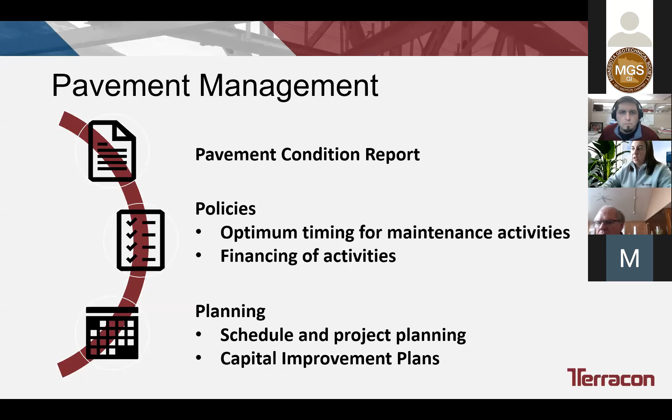Some people might be familiar with CIPs and cities really putting a plan together for, hey, what's our 5-year outlook, 10-year outlook? When should we mill and overlay? When do we need to do a reconstruct, and use the money we have wisely?

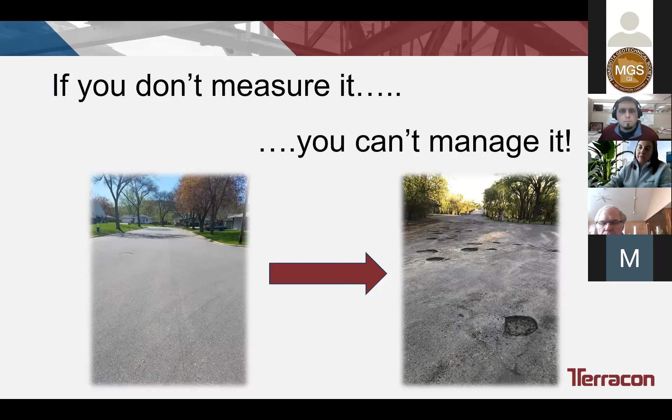So a kind of buzzword in my niche and industry is, if you don't measure it, you can't manage it. Like I mentioned, people saying it's good - what does that mean? So this data really gives people in public works, city planners, tools to help plan on a network level versus driving out and having a resident call and say, hey, my road's falling apart.

Giving them the tools to understand that. So what we collect when we do this is what we call a pavement condition index. Some people call it an OCI, an overall condition index, but it's a rating on a scale of 0 to 100. 100 would be a brand new road that doesn't have any distresses present in it yet. It hasn't cracked, so that's a perfect 100 rating.

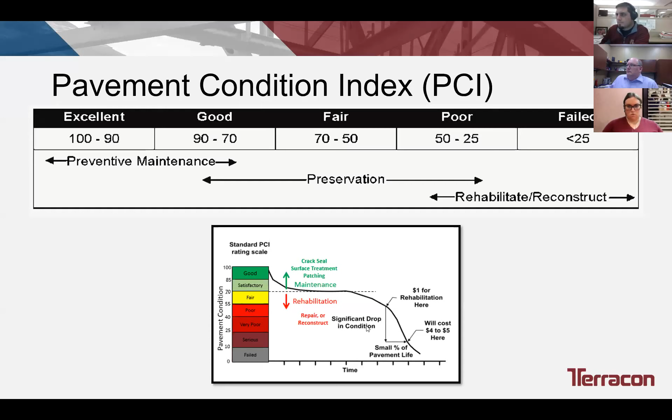So we follow here at Terracon ASTM 6433 as our means of inspecting the roadways and parking lots. We go out and rate a road and measure everything based on what's on the roadway - measuring all the linear cracking, potholes, patching. There's a slew of distresses both for asphalt and concrete that you type into different programs like Cartegraph, Paver, Icon, and you can input this data and the programs calculate this PCI for you.

So it's a really unbiased way - I don't assign it a rating, it's based on the data that's out there. As I mentioned, the more types of distresses, the higher the severity level, and the more - 100 feet versus 10 feet - will increase your deduct value, and you start decreasing from that 100.

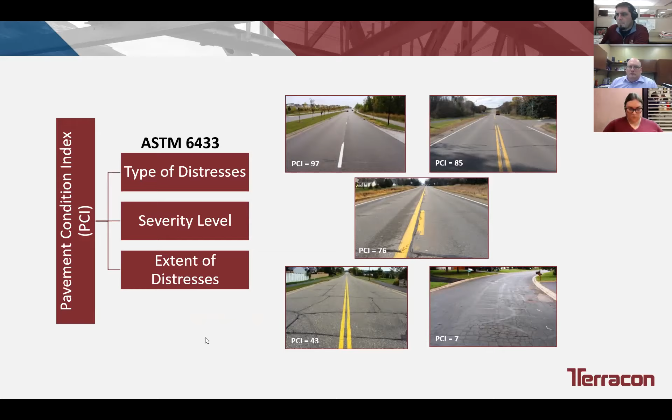But I did want to highlight the different means of collection. So kind of the way the industry used to run, in what I'm calling the old fashioned way, is doing it manually, which there's nothing wrong with that. It's more time consuming, it's a little less safe - we're out walking in between traffic.

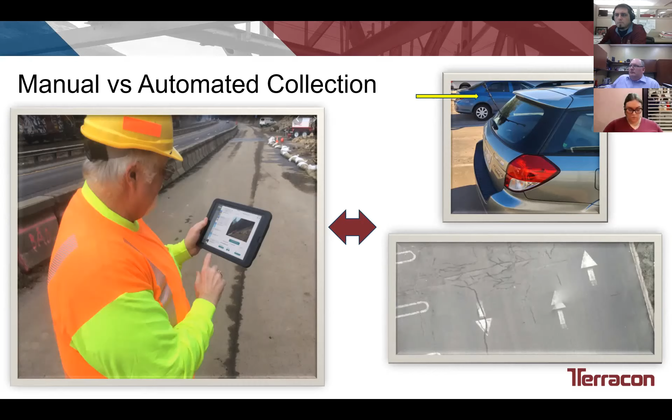On higher speed roads, it's a little bit harder to do safely, but you go out there with a tablet and type everything, measure everything. The way the industry is moving is more towards drone collection vehicles. MnDOT has their Pathways van that collects this data, so they're going more towards automated data collection of this information.

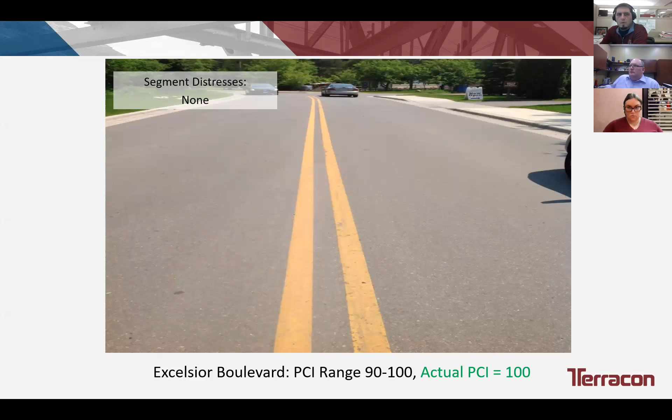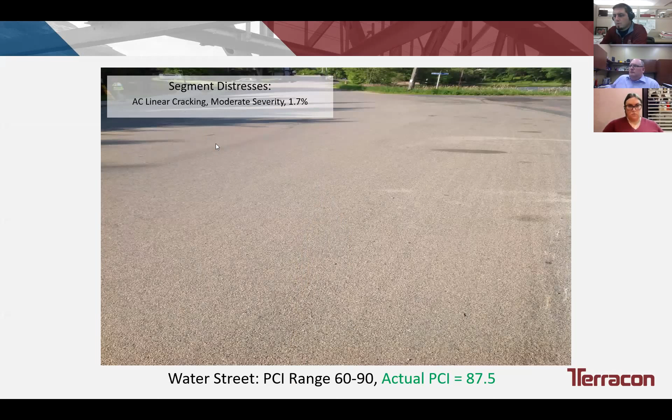I want to point out, a road that has a lower pavement condition doesn't just mean it's old. It could have not been designed appropriately. It could have more traffic related issues and heavy loading than it was designed for that could cause premature failure. So pavement condition index doesn't always correlate to age, but in a lot of cases, the older it gets, the more distresses start showing up.

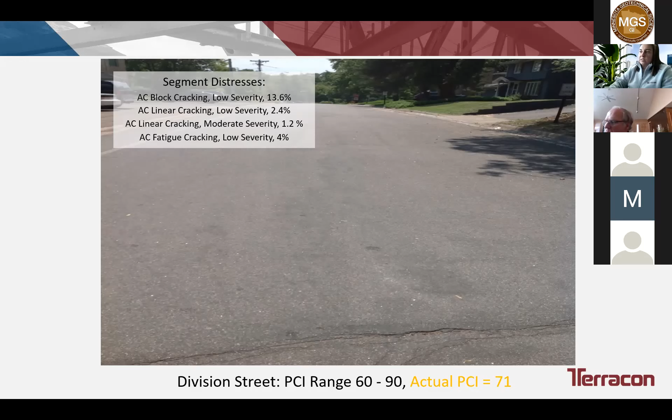So this road had a lot of linear cracking. We're getting into block cracking and fatigue cracking. Really these surface readings are kind of us reading between the tea leaves. Fatigue cracking, for example, can tell the story. A lot of times that's indicative of a subgrade failure, but it could also be from repeated heavy traffic loading that can cause that alligator fatigue cracking.

So that's why we partner a lot of this information with a geotech investigation to help determine what lies beneath the surface and kind of back up our recommendations.

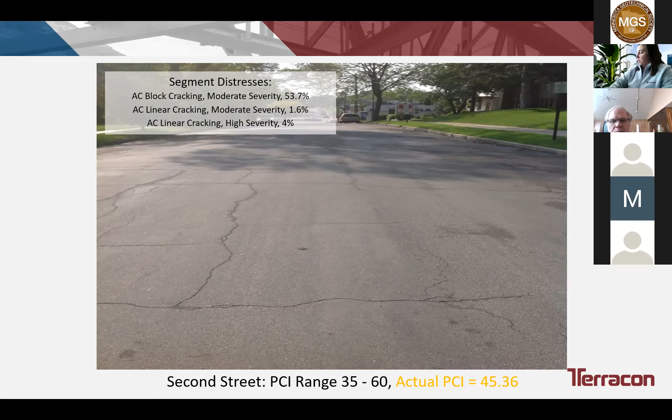So here's a road that's rated a 45. You start to see the distresses becoming more apparent. There's some block cracking showing up, higher severity linear cracking leading up to that rating of a 45.

This is rated a 26. You can kind of see, I know the sun's shading it a little bit, but if you look down the road here, some patching. This has maybe been chip sealed previously and that's worn off. There's alligator cracking that's maybe been masked by some of the patching.

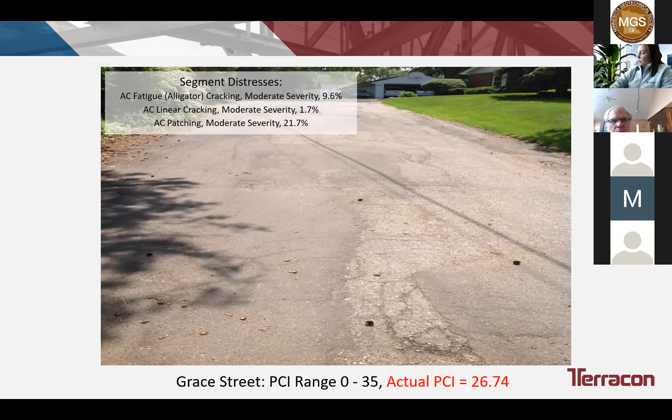So we've reached a point that a mill and overlay might not be the right option anymore. It's maybe too far gone that would be cost effective. And then here, obviously, same situation. We've got a lot of heavy alligator cracking, that high severity linear cracking. So sometimes there are issues that impact pavement, drainage issues, or just being old.

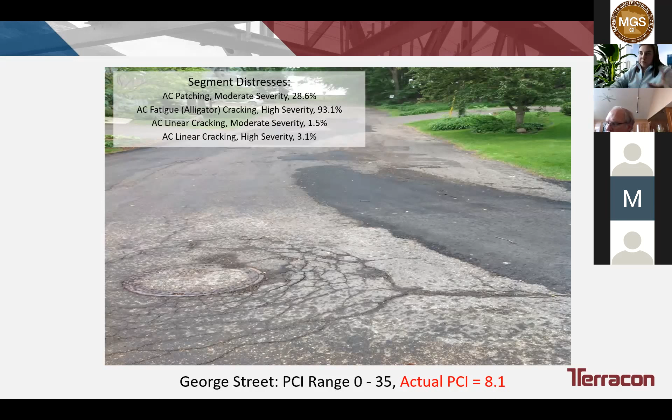So this is kind of the background information. I've kind of breezed through the pavement management side of it. Now I want to get into how we partner this with geotechnical information.

But these next two figures just show you can take these ratings and put them on a map and put this tool in the hands of, like I mentioned, a city planner or public works director to say, hey, here's a snapshot of where the good roads are. The good roads that are rated on this map in blue, a 90 to 100, those are in good condition.

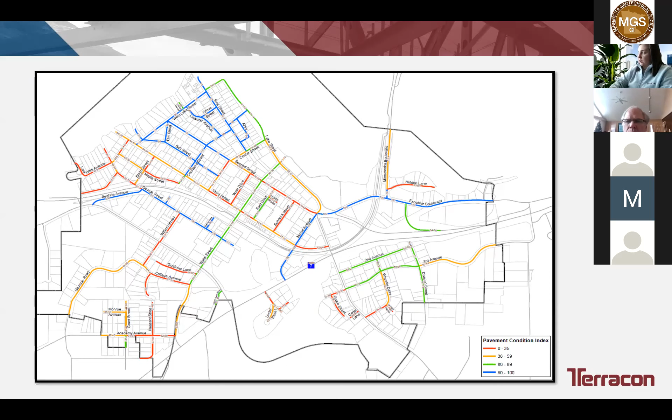They might need a surface treatment, some crack sealing. The roads that are red jump out. Those obviously have failed and need a robust fix, but look at those roads that are green and yellow. There's maybe a chance to salvage those roads, and getting those for timely maintenance would be useful information.

And like I mentioned, it's not just municipalities. You can do this for commercial sites. This happened to be a school district, but you can break up the lot into different segments. Where's the parking stalls? Maybe there's a concrete portion that's designed for heavy loading, like loading docks, for instance. Those would be rated as a separate segment so that the ratings aren't blurred.

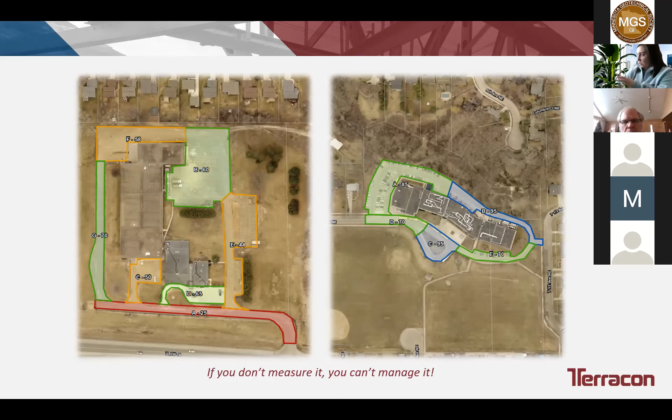You like to set up these investigations by logical segments so that you're not rating a brand new segment as 100 when this 500 feet of road has failed and now your rating is a 50. That doesn't really tell the whole story when really you have a perfect section and then a segment that's failed. So as a first step to these, it's important to break up the segments into logical components.

And then this graph, I've seen this quite a few times in different forms, but basically what it's showing is you can design a road and walk away from it, right? And it's going to fail, following the trajectory of that yellow dotted line. You let it go and a road could last maybe 20 years. Sometimes you design roads for longer than that, but let's say 20 years. The point of using this data is to do timely maintenance, like this graph shows, seal coats and overlays to try and extend the life of those roadways.

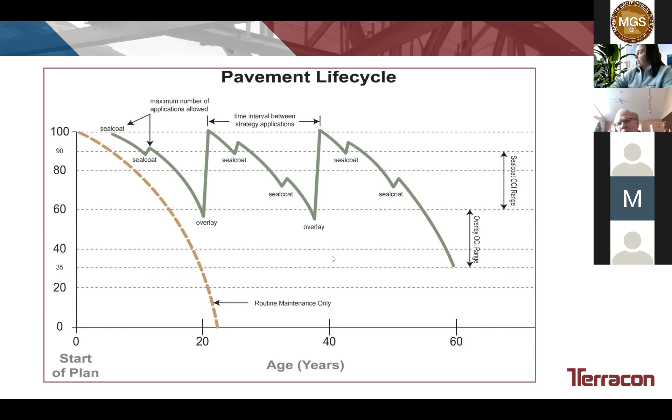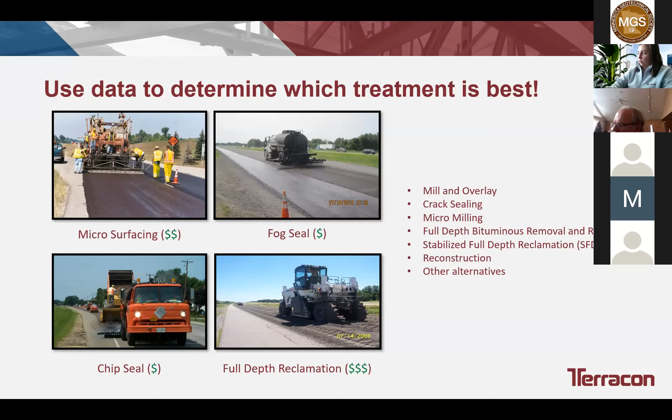We're talking 20, 30, 40, 50 years with proper maintenance implemented. So this data is again used to determine which treatment is best. Minnesota here is one of the leading states with research, and there's plenty of tools in the toolbox. MnRoad's always investigating, MnDOT as well, but different treatments, like fog seals and microsurfacing, are becoming a big deal to try to extend the lifespan of a road at a lower cost.

So, okay, what everybody's been waiting for: how can forensics help with this? These are just some examples I've come across that I save in my folder to pull out when needed. They're the interesting cores I've come across in my background.

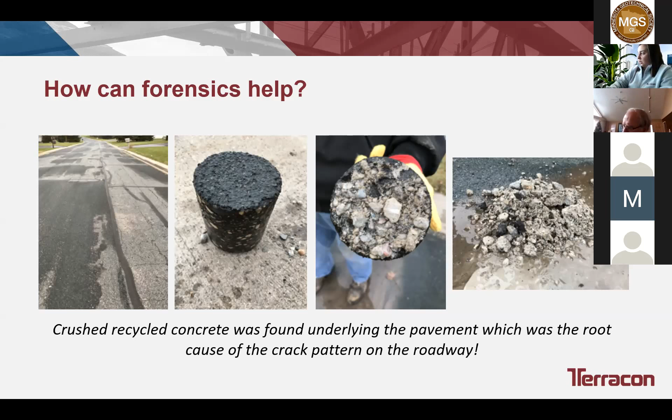So we had a road, you can see on the left picture here. If you stood back and looked at it, it was cracking the way you'd expect concrete slabs to crack, but it was an asphalt road. So we did some cores to see what was happening underneath, and sure enough, there was crushed recycled concrete below that asphalt that was rehydrating and re-solidifying, forming the subgrade to act as a concrete slab. That crack pattern was then reflecting through to the surface. So doing a mill and overlay wasn't going to prevent that crack pattern from happening, but going out and removing that recycled concrete was a better solution. I do believe that's what the city ended up doing.

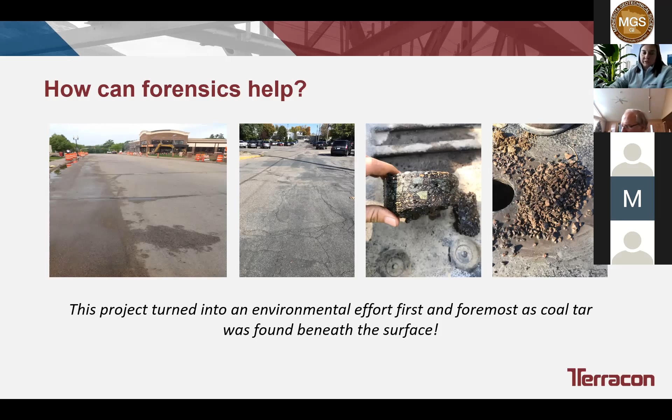Another reason that isn't maybe front of mind, but also important when you talk about forensics: sometimes you open up and expose what lies beneath. This was a project locally here where we sent a coring crew out, and we had comments coming in that their fingers were getting tingly. We sent environmental folks out, and they discovered coal tar buried beneath the surface. So that project was paused, and the right environmental people were brought out to remove that safely. Sometimes that's not preventable - one option could have been to mill and overlay and therefore not expose that material. But once the fix is in and a reconstruction is needed, that's going to be brought to the surface no matter what, so it needed to be handled safely.

I mentioned drainage earlier on. Sometimes you just have a lot of clay, wet, non-draining material underneath the pavement that needs to be corrected. That, tied with adding more crown to a roadway to get the water draining, is also useful when you come to the design. But sometimes if you don't have good draining material underneath, that needs to be part of the solution as well.

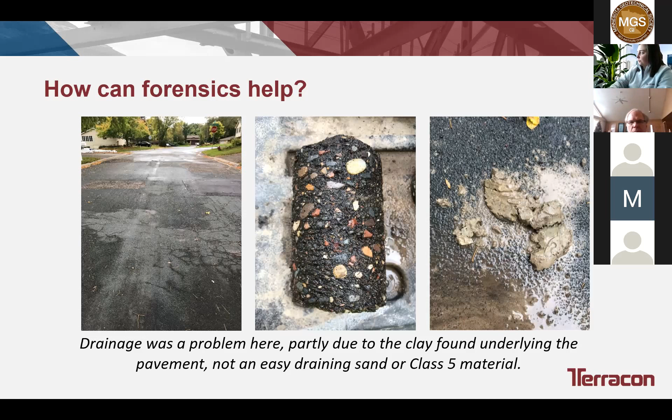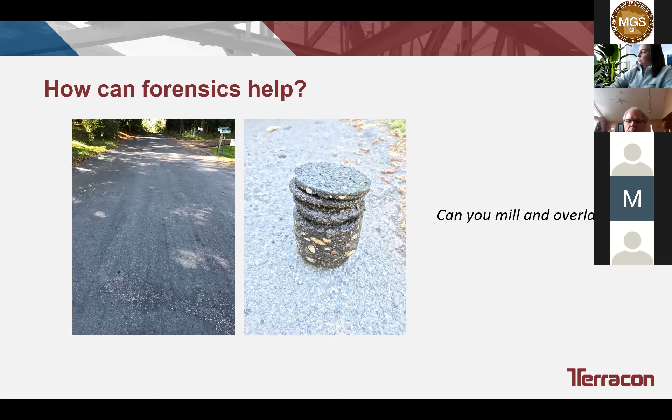Forensics can help - let's say I asked a city public works director, okay sure, we have 6 inches of pavement, but what if it looks like this? Can you mill and overlay this type of road? A recommendation would be to at least get through those debonded layers where you're dealing with the structure that's bound together. If you have layers that aren't tacked and bonded together, they're really performing and carrying load in separate sections - they're not acting as one uniform pavement structure. So having that good layer and making sure the layers are bonded together is important. A recommendation here: you might be able to mill and overlay this, but the recommendation would be to at least get through that first couple inches and reestablish a good bond between those layers so that your pavement structure acts as one.

And then sometimes the pavement is just old. Pavement doesn't just age - what happens is the surface dries out and oxidizes. The sun dries out the binder from the surface and leads to micro cracks, which leads to more cracks, and it just dries out. It's like the analogy of sunscreen, why you put sunscreen on your skin to prevent wrinkling - think of that as the same purpose of a chip seal or fog seal on the surface. You don't want it to dry out and become brittle. But sometimes as the pavement ages, you get the bottom aging, working from the bottom up, where moisture in the structure causes you to lose a lot of the fines and binder, and it just becomes weak.

So a recommendation on these type of roads is maybe something like a reclaim or reconstruction. The concern being, if you mill off a good portion of that crumbled material, the rest of that will just crumble when the mill is brought in, and you're really not paving over a sound base. You'd be better off beefing up that subgrade and making it stronger.

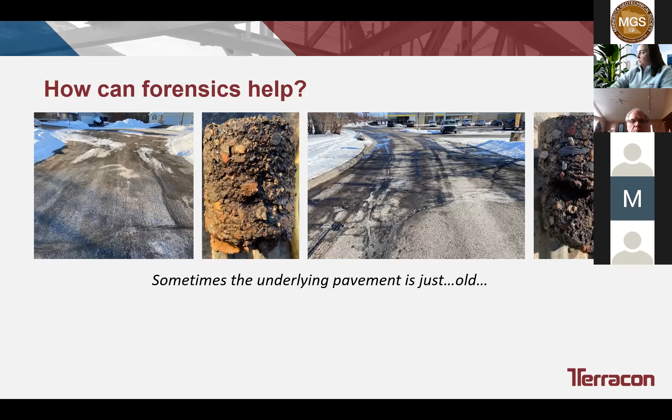Again, I kind of went over this one, but look at that. There's no bond between that lift at all. You can see the clean shear break there. So that pavement was never acting as was designed. It's really acting like that top 1.5 to 2 inches is carrying a lot of that load.

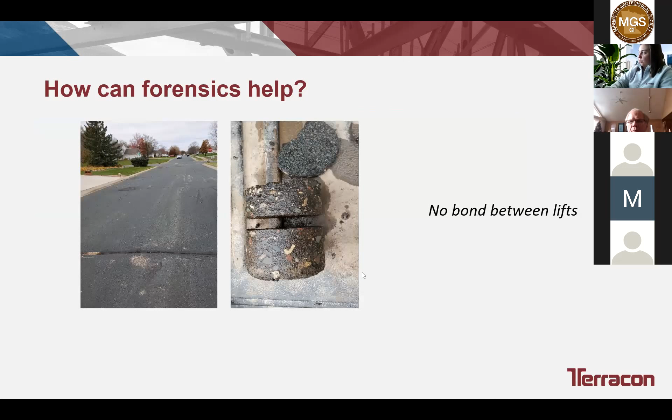So this is why we really emphasize tack. That's something that's kind of looked over, but you see how important that is and how prevalent that can be in the examples I've shown of these cores.

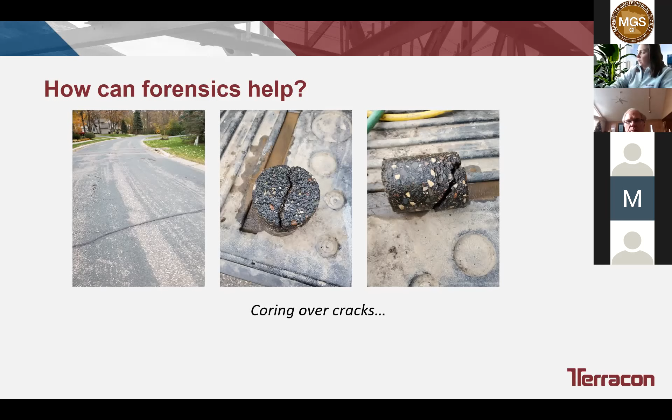And then when I call for cores to be taken, I like to take them over cracks. Sometimes it's important to know how deep those cracks go. A lot of cities are concerned with reflective cracking, where you mill off 1.5 or 2 inches of pavement, put a fresh clean surface down, and in a year or two all those transverse cracks just reflect right through the surface. But if we know from these cores that all the cracks are really confined to that top 1.5 inches, maybe if we do a 2-inch mill we will eliminate a lot of that reflective cracking. So that's why it can be important to core over the cracks themselves.

I also mentioned on this slide another reason to core is to look for things like fabric and geogrid. That's probably something you guys are more familiar with, and I know it's been used as an interlayer. One concern to point out: for cities building that from the start, if you ever want to reclaim a roadway, sometimes reclaimers aren't an option because that fabric gets tied up in the reclaimer. So that's a long-term concern - if you build with fabric down the line, a reclaim might not be an option. You could still mill and overlay or reconstruct a roadway that has that in place, but it does make it difficult to reclaim.

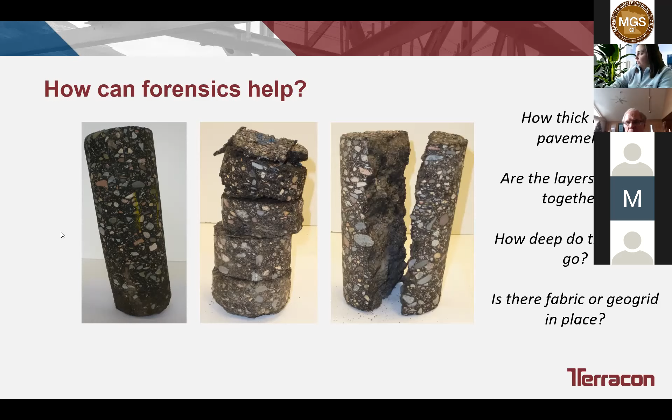Kind of just a shout out and a thank you, because that information comes in handy and shows how these two tie together. I often lead in a city or work with cities to do pavement management that a lot of geotechs might not be involved with or know exists, but you can see on the back end how that brings work to a lot of geotechs and helps cities when they get to a feasibility stage make decisions. We've had a lot of cases where they thought a mill and overlay was the right treatment, and when you take cores and understand the underlying condition, instead of going down that path and getting so far into the design process, they can reassess and go in a different direction. So it is a huge cost savings to know what you're dealing with and not be surprised at the last minute.